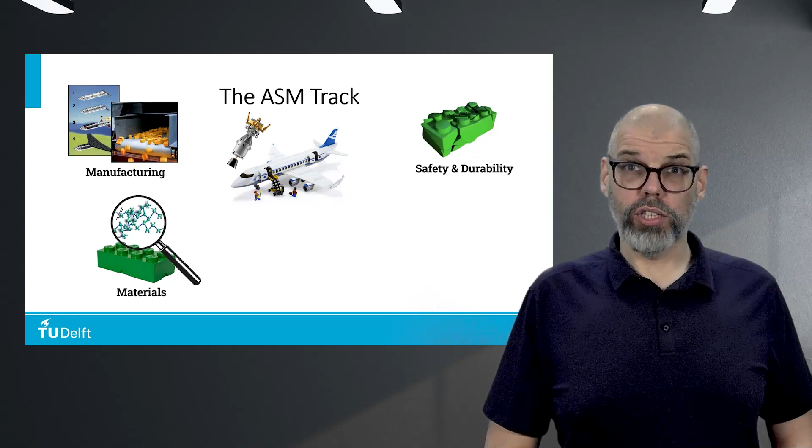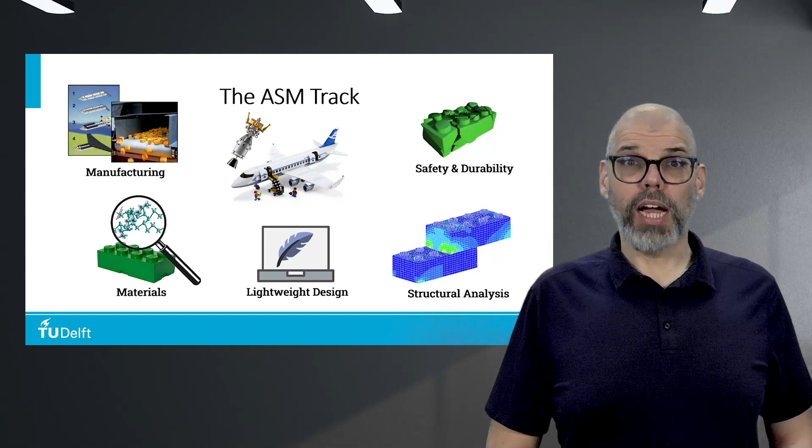Well, in order to realize these structures, we need to start with understanding the materials they are made from. We then have to look at how we can combine and shape these materials into parts, assemblies, and the final desired structure. Of course, this can only be done after a thorough evaluation of the safety and durability of the structure, which is linked to the detailed analysis of the demands placed on the structure. Finally, all of these topics are linked by a design and optimization process aimed at making the most weight-efficient structure.

Now that you know what ASM is all about, what challenges exist in the field which are driving research within our department? Well, let's start by representing the present-day aerospace structures by this simple structural icon. Not too complex, and indeed we're quite capable of designing and building such structures.

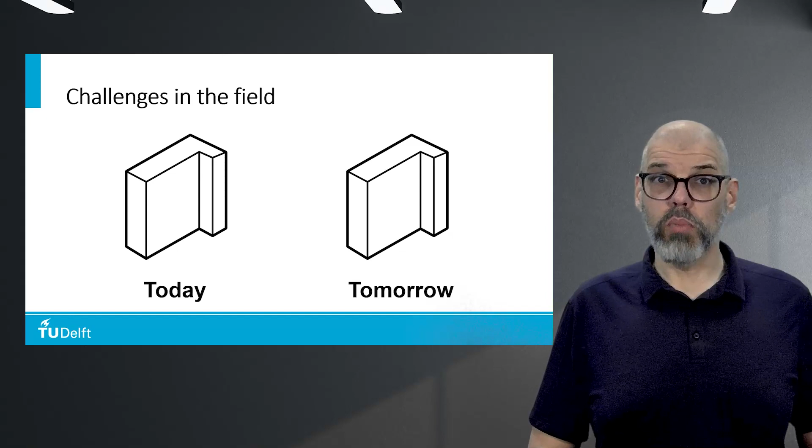But if you look at the direction which structures are heading, you start to see more and more complexities arise. Novel materials such as self-healing composites, the need to be more sustainable, including complexity inspired by what we see in nature, and adding multifunctionality, doing more than just carrying loads like old structures did. And finally, smart structures with embedded sensors and diagnosing equipment.

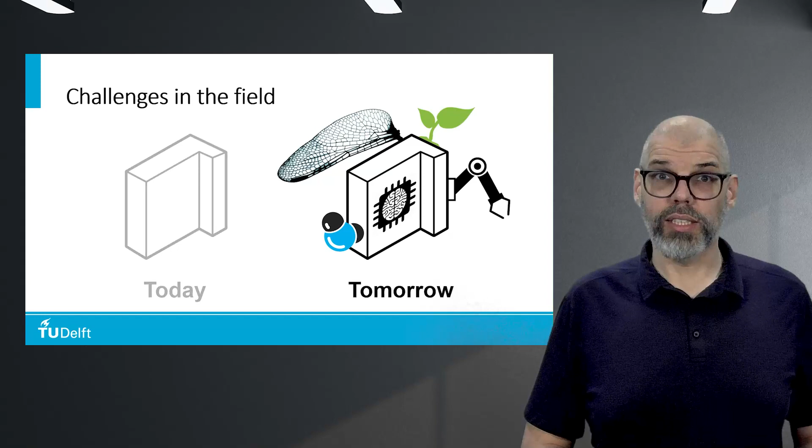If we relate these to our previous themes, it raises many questions such as how to deal with these complexities in design or how to ensure that they are safe. And these are just some of the questions that arise and that we explore with our education and research within the ASM track.

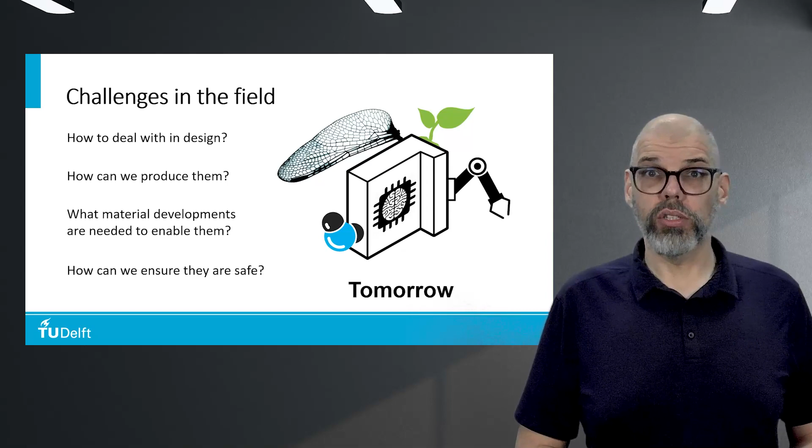If you decide to join our track, you will have your choice of 3 different profiles to specialize in. The Materials and Manufacturing profile is for students who are interested in developing new, high-performing materials and advanced manufacturing technologies for aerospace applications, ranging from designing materials at a microscopic level to applying novel manufacturing methods for the creation of complex structures with enhanced durability and functionality. We like to say that these students like to turn atoms into aircraft and spacecraft.

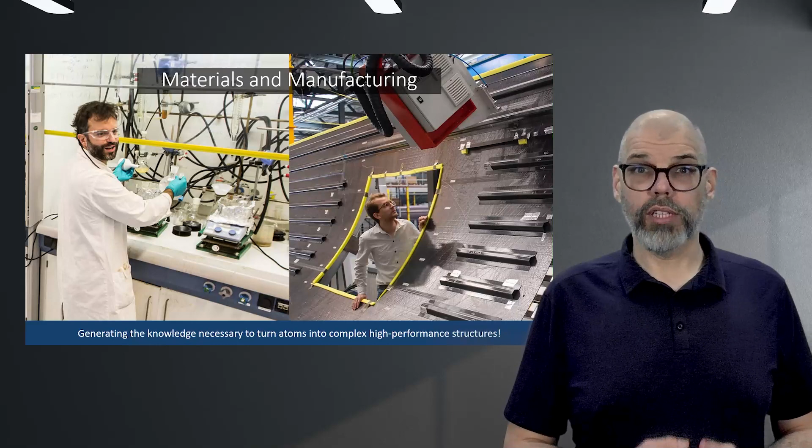The Design and Safety of Structures profile is for students who are interested in creating innovative, robust, and durable lightweight structures that combine accurate experimental, analytical, and computational methods to predict and optimize the performance of these future aerospace structures. Students in this profile become experts in understanding and learning from failure so the public can feel safe and secure.

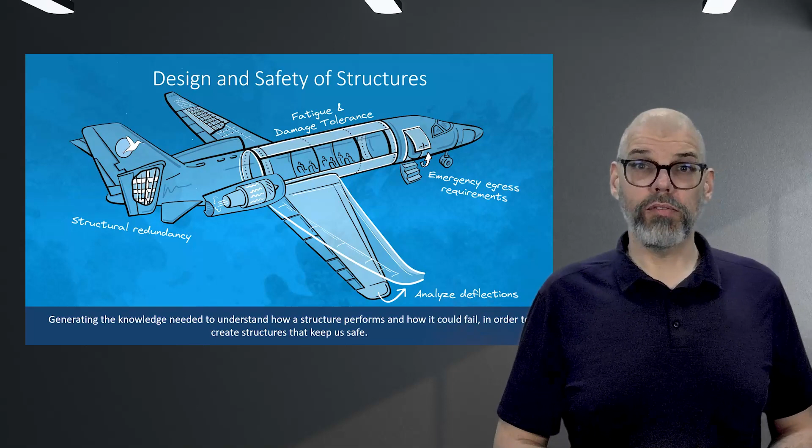Finally, we have the Structures for Space profile, which is for students who want to join the rapidly growing space sector as structural engineers in design, analysis, and verification of the next generation of spacecraft, satellite, and launcher structures. Students in this profile will get a taste of the perspective of the previous 2 profiles, but from the unique context of the demands for spaceflight.

Unique to the ASM department is the completely flat structure with no distinct research groups tied to individual profiles. What does this mean to you? Well, it means that regardless of the profile you are studying within, you are free to complete your thesis with anyone in the department and even on topics outside of your profile. This gives you a lot of flexibility to pursue research and thesis topics that interest you without being constrained by the profile choice you are making early in your studies.

Speaking of research, we are lucky to have an amazing structures and materials laboratory and the SAM XL field lab. But rather than me telling you about it, I'll let some of my colleagues show you.

Let's meet some people and the labs they work in.

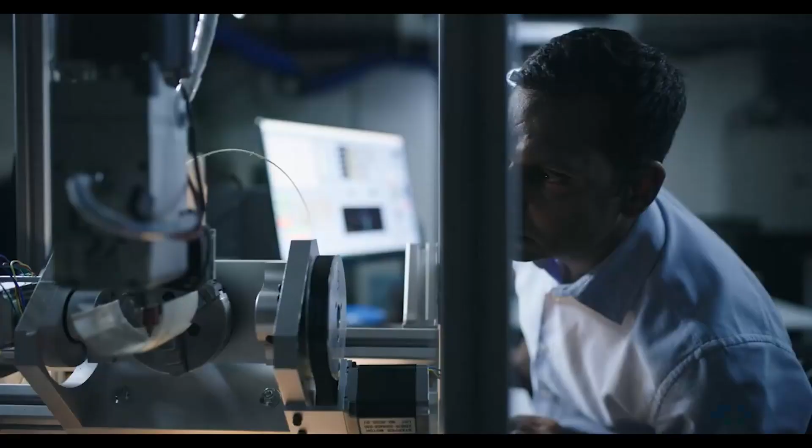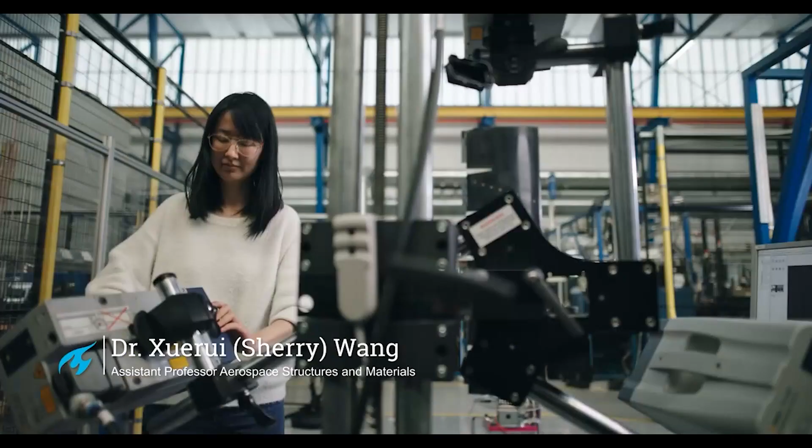Hi there, I'm Sherry Wang. I'm an assistant professor here. I optimize future aircraft design by doing interdisciplinary research on aerodynamics, structural dynamics, flight dynamics, and control theory.

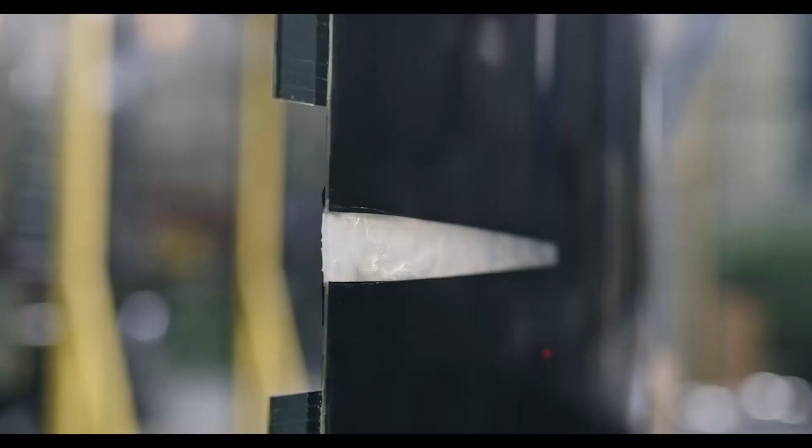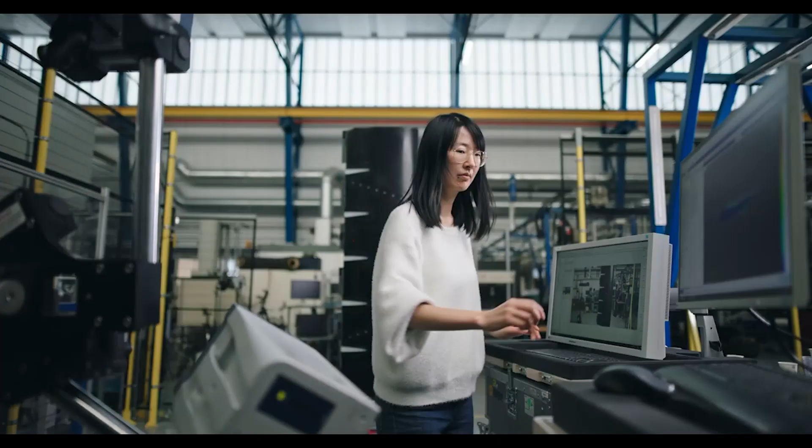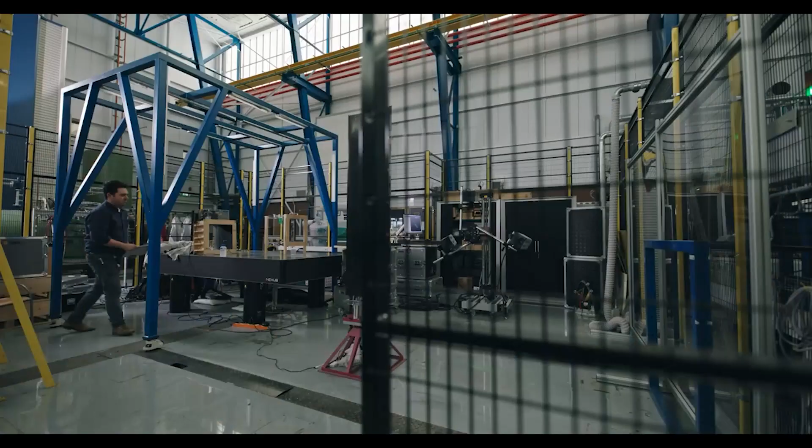Today I'm working on the Smart X Wing, which is an active moving wing that can adapt its shape to different flight conditions and missions, just like birds do. With multiple axis accelerometers, we can monitor the dynamic responses of the wing, and with the 3-dimensional laser vibrometers, we can identify the structure mode shapes. By actively adapting the wing shape, we can reduce energy consumption by up to 30%, contributing greatly to sustainable aviation. The Dynamics Lab is part of a highly advanced lab, the Aerospace Structures and Materials Lab.

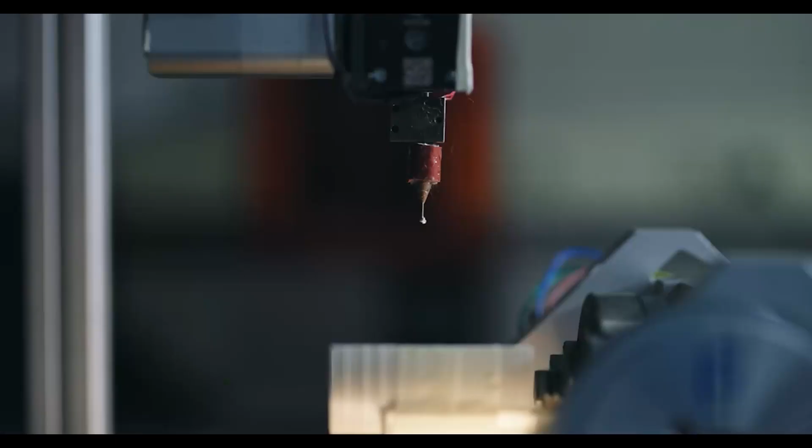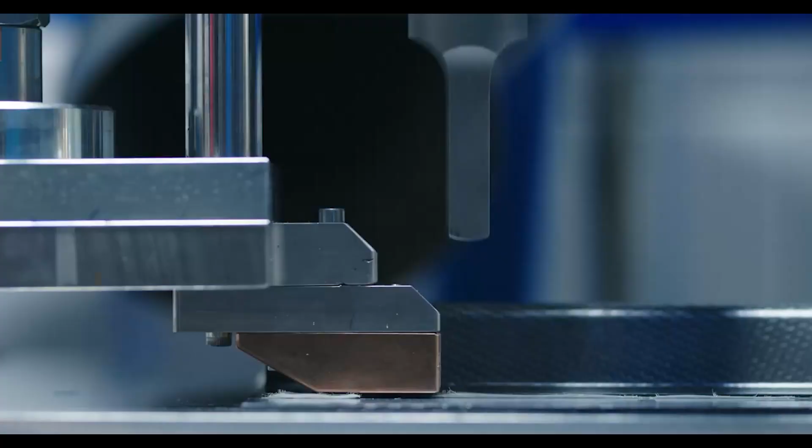This huge aircraft hall is full of equipment and labs, from a chemical physical lab to laser facilities, a composites lab, and equipment where we can destructively test the materials and components we make. This is the best way to learn how to improve safety. A key component in aircraft safety is to have reliable methods to assemble individual aircraft components.

Hi Bram, can you show us around your lab? Welcome to the Composite Welding Laboratory. In this lab, we perform research on welding technologies for thermoplastic composites. Welding is a very clean technology that makes use of heat and pressure to fuse two parts together. In this lab, we developed our continuous ultrasonic welding technology, which is very new, very efficient, and very, very fast.

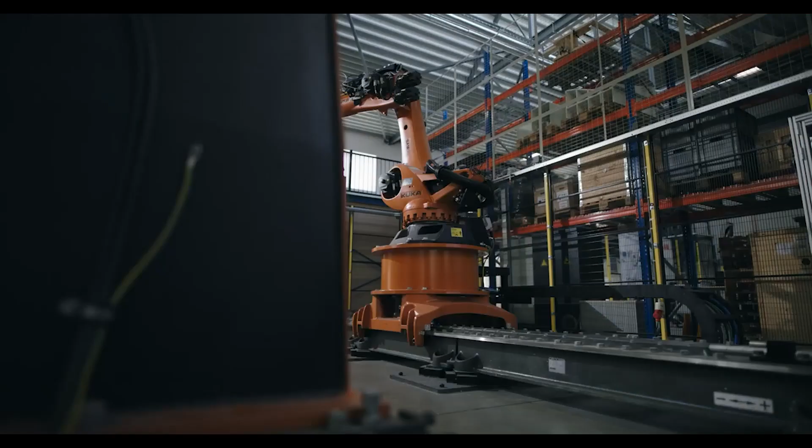To further develop and mature it, we take it to our field lab SAM XL, where we further scale it up and de-risk it so that it can be used on a large scale to actually weld real aircraft structures.

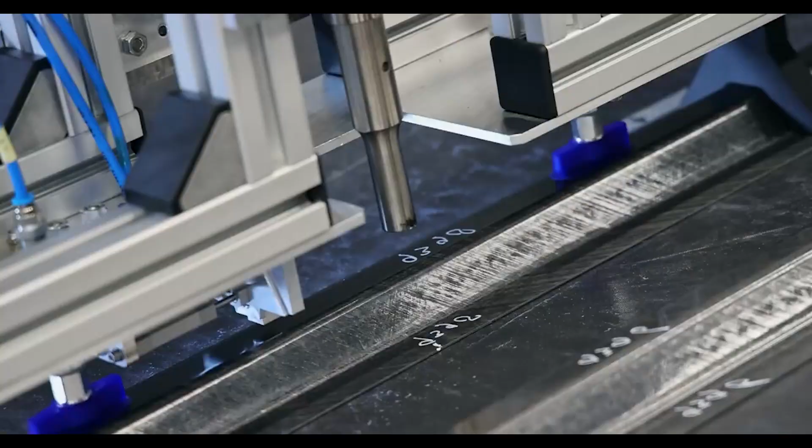Welding can make aerospace structures smarter, lighter and cleaner. 3D printing can do so as well. Let's find out how and meet Kunal. Hi, I'm Kunal Masania. I'm Associate Professor in the faculty, and welcome to the 3D Printing Lab.

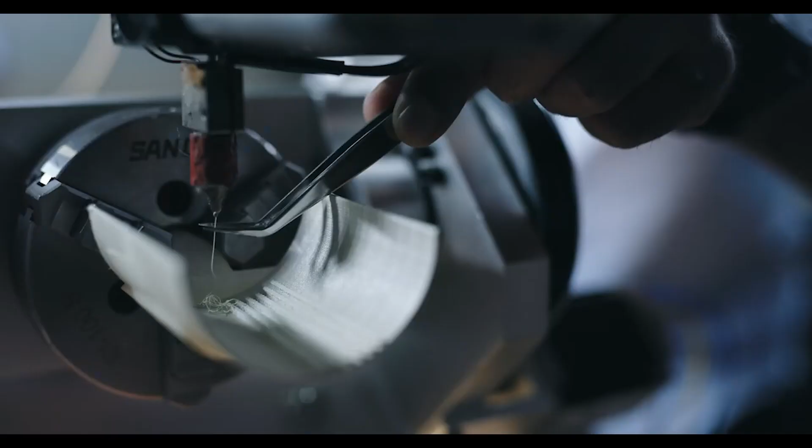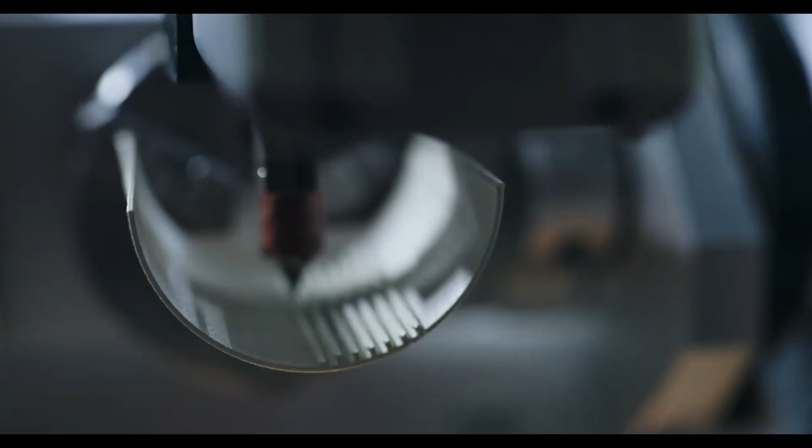Here we try to replicate the intricate designs of materials found in nature using 3D printing technologies. We exploit nanoscale self-assembly together with the shaping freedom of additive manufacturing to realize next-generation sustainable aviation materials. Here we focus mostly on fundamental science, and what's really exciting is that we can collaborate with the field lab SAM XL to quickly bring our ideas into implementation that can impact society in the future.

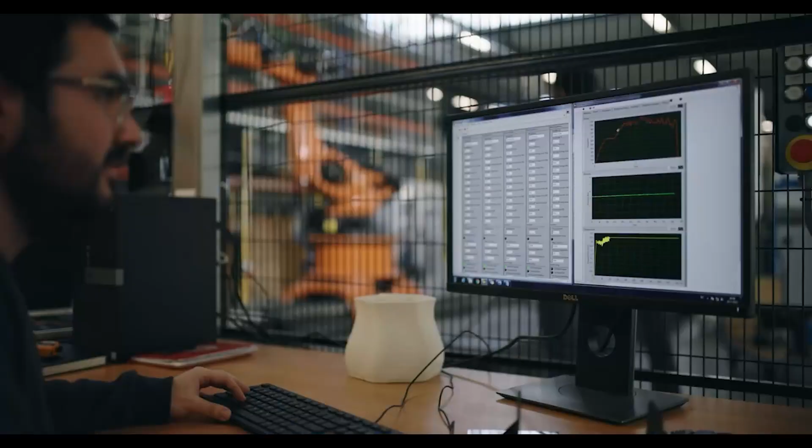That's fascinating! In this Aerospace Structures and Materials Lab and in Field Lab SAM XL, our researchers and students work on creating better, lighter, safer, smarter and, above all, more sustainable materials and structures.

So what happens when you finish your master's degree within our department? Many of our students go on to be engineers directly within the aerospace industry, designing the next generation of aircraft and spacecraft.

But that is not the only sector that desires the type of skills and knowledge you will gain in ASM. Lightweight structures and materials are becoming increasingly relevant across a wider range of engineering disciplines, with the increased focus on sustainability. Furthermore, the critical thinking and problem-solving skills you will learn are highly desirable in consultancy, startup, and even management environments.

The biggest challenge for you in your career might just be narrowing down what option you want to pursue. Thank you for taking the time to learn a little bit more about the ASM Master Track. I wish you much success in your future master's degree endeavors, no matter which track you choose. But I hope ASM continues to be one you consider.